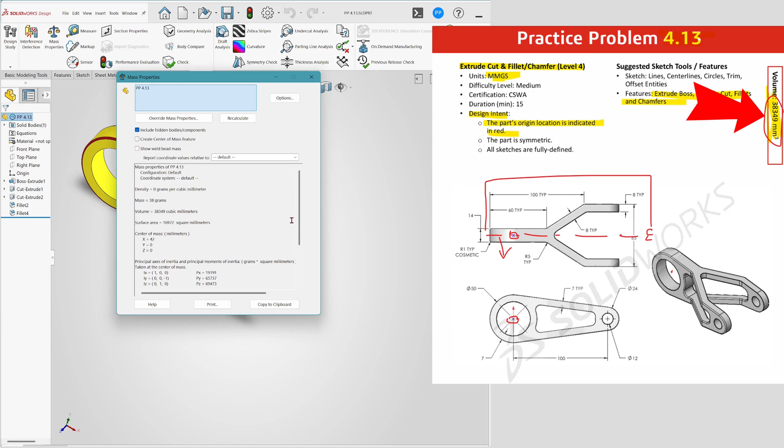Make sure to watch this video until the end. I'll show the full modeling process and point out the most common mistakes that can cause the result to be wrong. Before we start, let's quickly review the important details from the drawing. We're working in MMGS units, and the origin is located at the center of the 50 millimeters diameter hole.

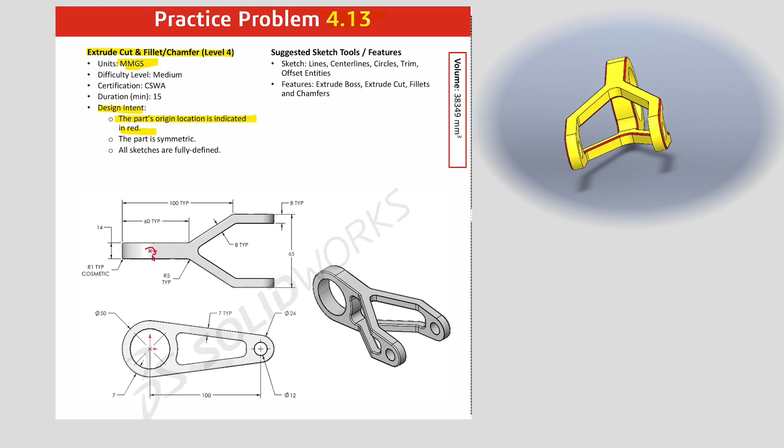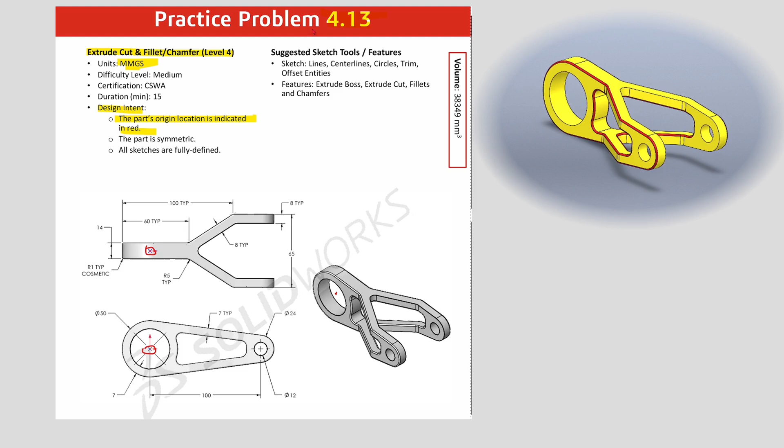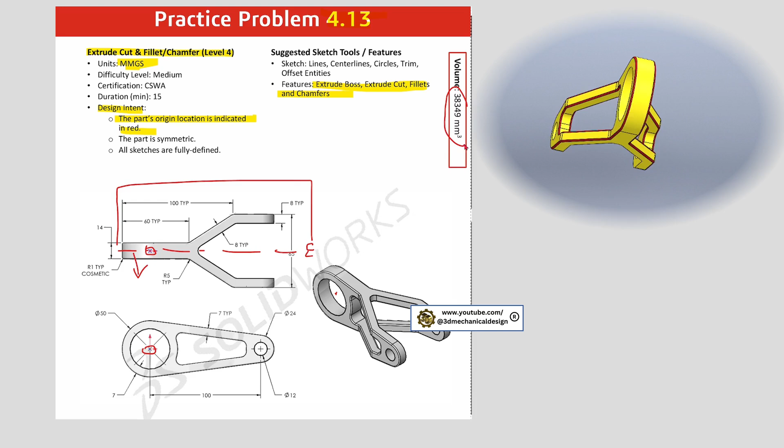For this part, the main features we'll use are Extruded Boss, Extruded Cut, fillets, chamfers. You can also see that the part is symmetrical relative to the horizontal line. Let's draw the top part and use the mirror tool. We're also given a volume of 38,349 millimeters cubic to verify the part. Now let's open the drawing and start modeling step by step.

Now let's start on the front plane and create a new sketch. First, draw a circle with a 50 millimeters diameter. Then use Offset Entities and create an inner circle 7 millimeters inside the original one. Next, draw a horizontal line 100 millimeters long. At the end of that line, sketch two circles, one with a 12 millimeters diameter and the other with a 24 millimeters diameter.

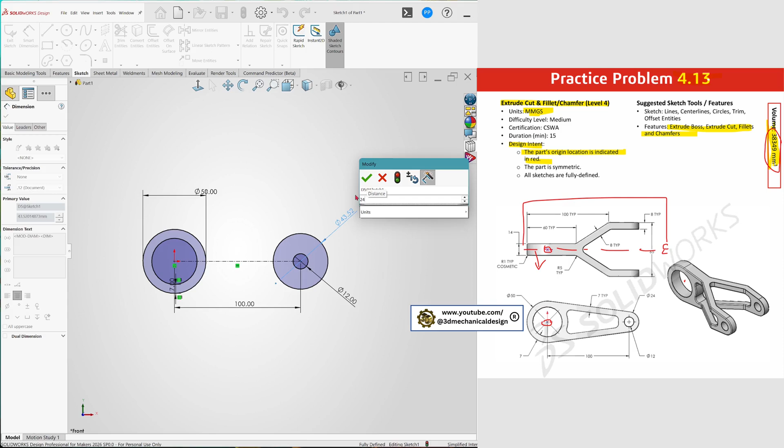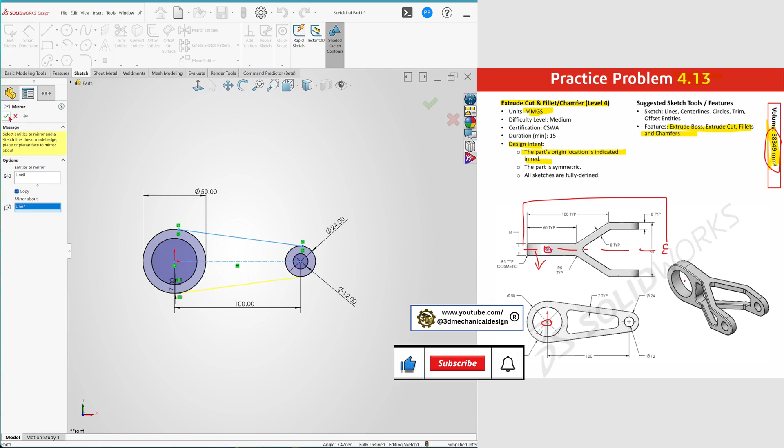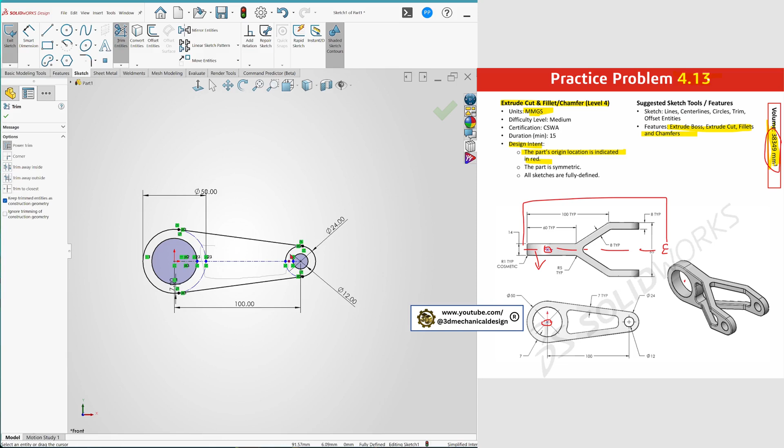Now connect the larger circles with a line and make sure the tangent relations are applied correctly. After that, mirror this line to complete the shape on the other side. Use the Trim Entities tool to remove the extra sketch segments and clean up the profile. Once the sketch is ready, go to Extruded Boss and set the feature to midplane with a depth of 65 millimeters.

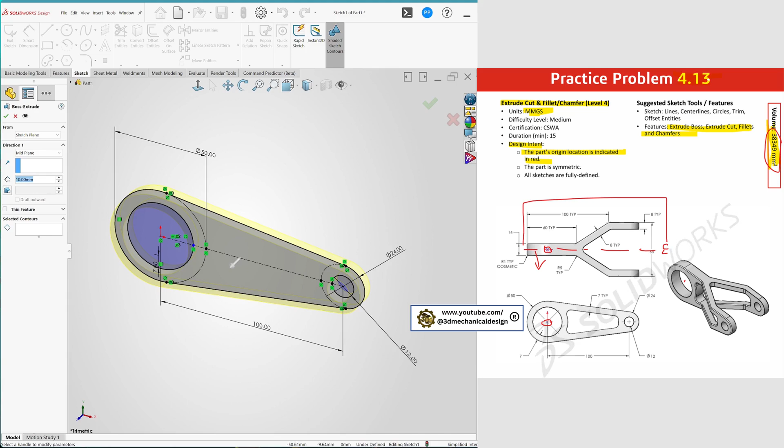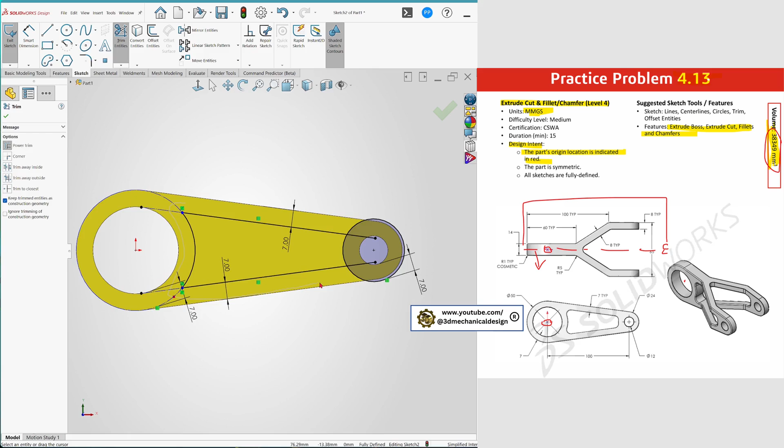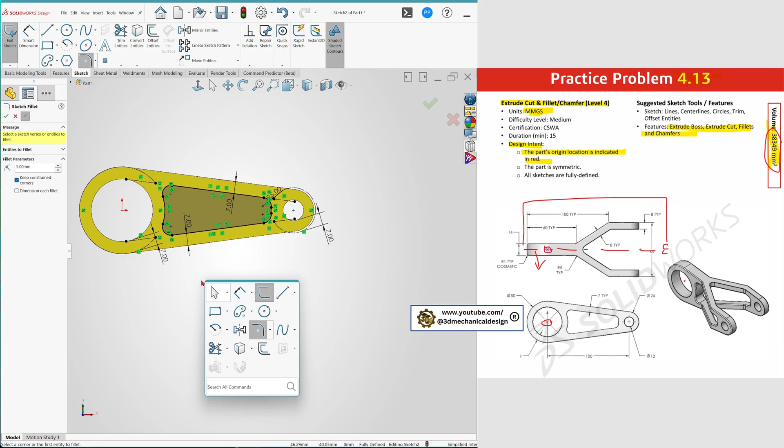Great, now let's create the inner cutout. Select the front surface of the part and start a new sketch. Use the tool Offset Entities at a distance of 7 millimeters to define the inner contour. Then trim away the unnecessary lines and add 5 millimeters radii. At this point, the sketch should be fully defined. Finally, apply Extruded Cut and click OK.

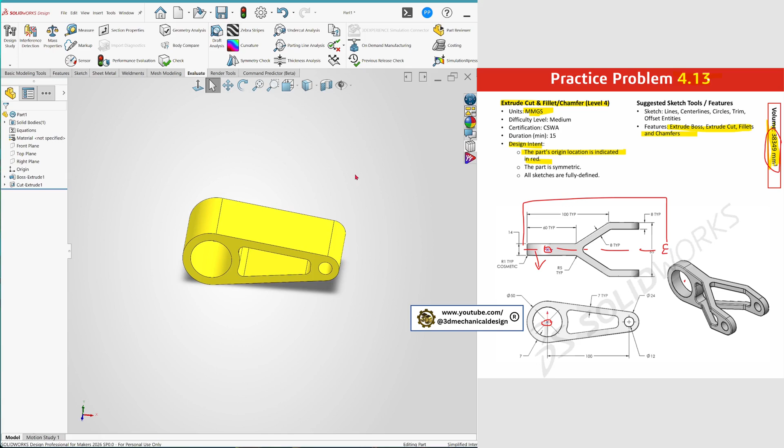Now select the top plane and start a new sketch. First, draw a horizontal construction line. We'll use this line as the mirror axis for the sketch. Then create the upper profile and add all the dimensions exactly as shown in the drawing.

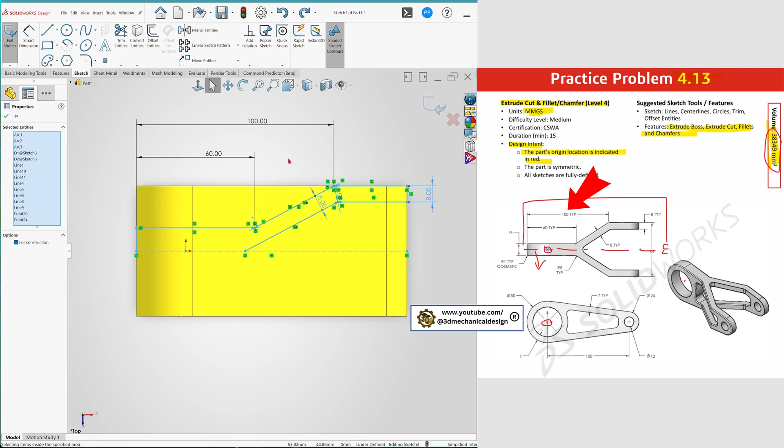Next, add the 5 mm radii where required. After that, use the mirror tool to complete the lower half of the sketch. Now add any missing dimensions until the sketch is fully defined. Once everything is complete, we can move on to the Extruded Cut feature.

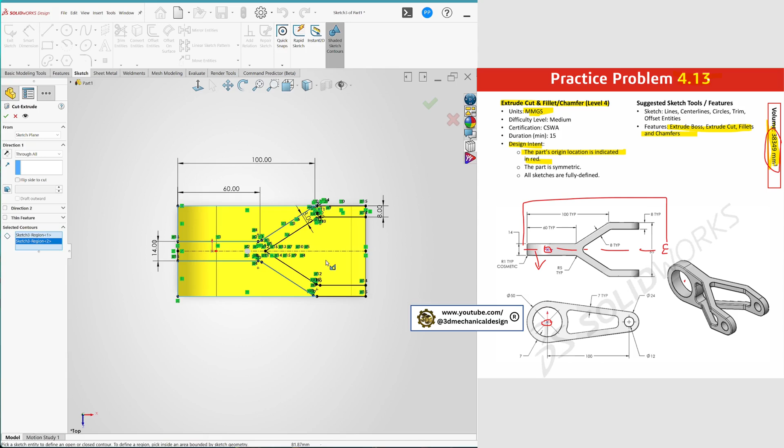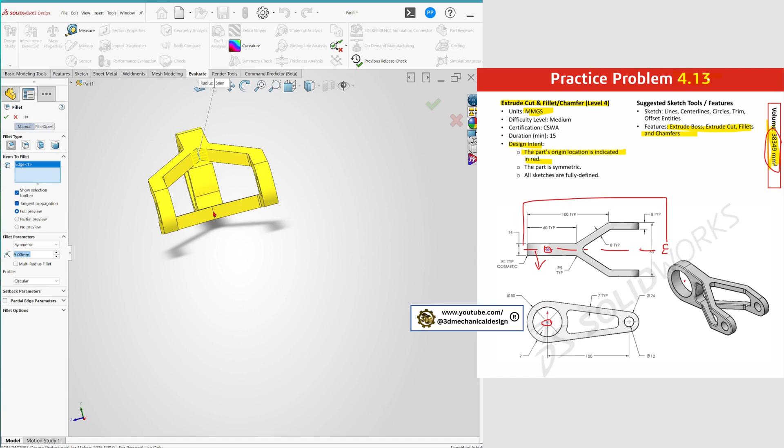Select Cut Extrude, then choose Selected Contours. Pick the contour that needs to be removed, and set the end condition to Through All in both directions. Then click OK. Great, we're almost done. Now add the final fillets. First the 5 mm fillets, and then the 1 mm cosmetic fillets.

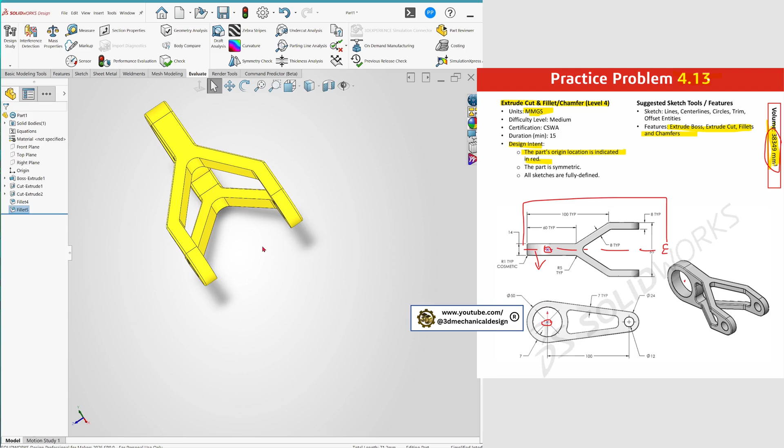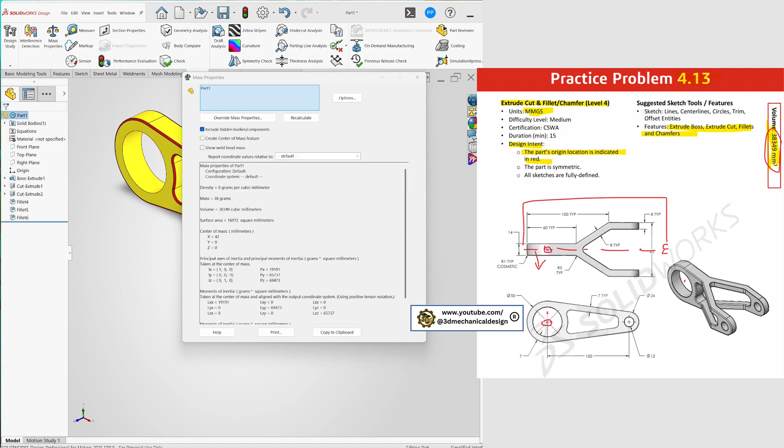Let's check the volume. As you can see, the result is 38,349 cubic millimeters, which matches the drawing 100%. One important thing to notice here, the cosmetic fillet is not included on the inner edge. If you accidentally select that edge, the volume will be incorrect, so be careful with that detail. And that's it for today's model.